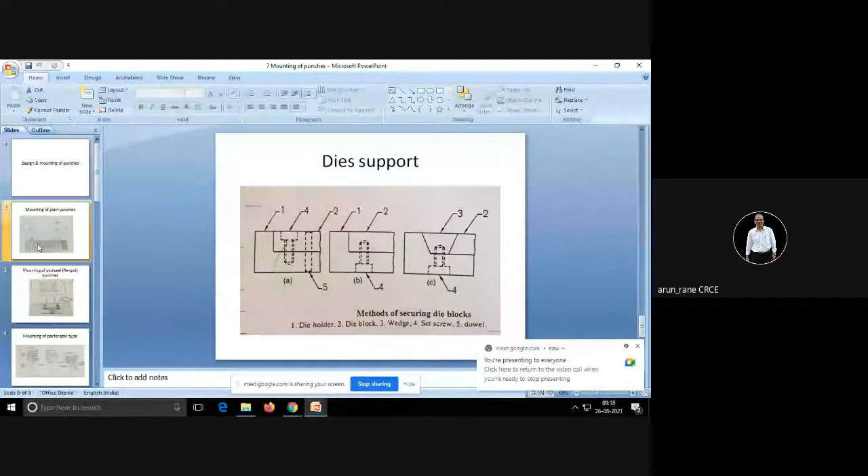Yes, we are discussing now the design and mounting of the punches. So how to design and how to mount the punch. This is a simple drawing showing how to mount the plain punches. Just have a look.

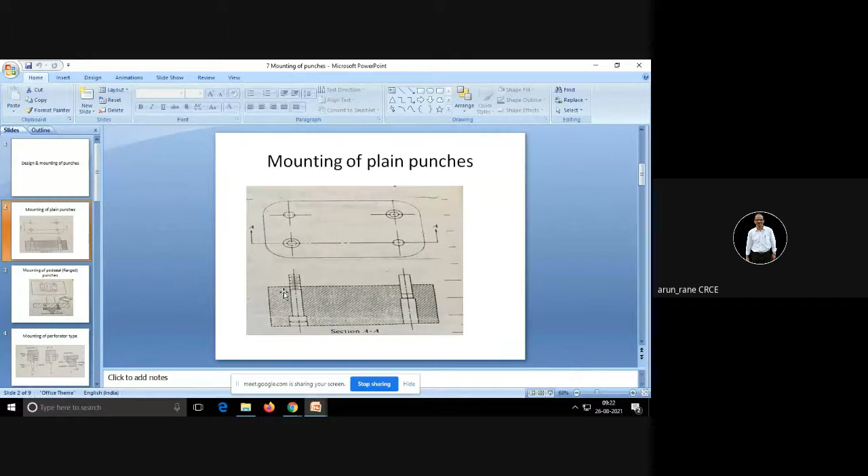This bolt will hold the punch firmly. The problem in this case will be that since it is a threaded joint, there will always be a play in the male and female piece. So you will not get good accuracy of mounting the punches. That is, the punch will not be concentric to this center line, because there is always some amount of clearance in threaded joints.

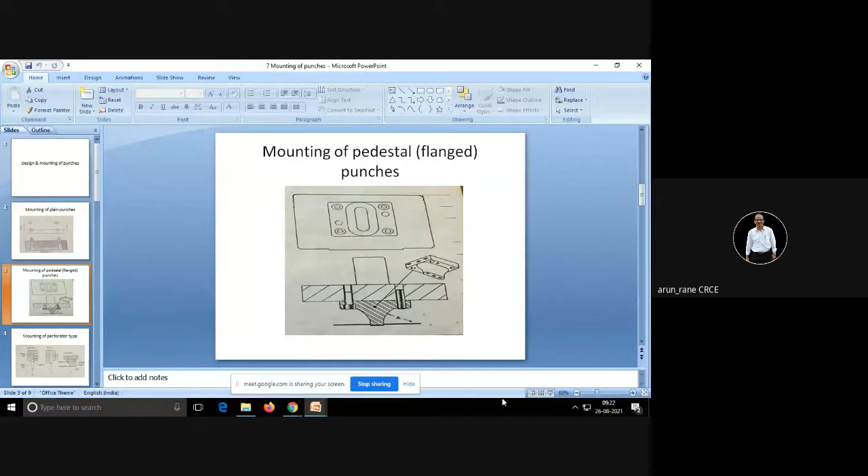If it is a flange type punch, let me give some time for reading and understanding this drawing. This is a punch here, let me zoom it. This is the punch, and this is your stock or strip. The 3D view of this punch is also shown here. You can also check from the top view how the punch is mounted.

So the punch is of rectangular shape, and it is held with the help of these four bolts. These are the four bolts. Now, can anybody tell me what these two holes are for?

Anyone? [Student: For locating.] Yes, and these are the holes for the dowels. These are called the dowel holes. So with the help of these dowel holes, your punch will get located precisely.

So these holes are actually reamed holes, and this is the punch. Now this is not a round shape, it's a rectangular shape, isn't it? That means the orientation of this is very important. It should come perfectly parallel or perpendicular to the edge.

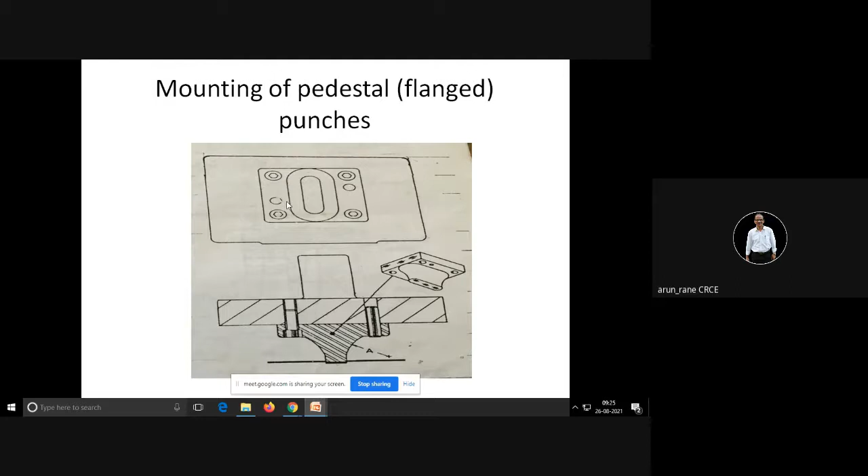Just have a look on how these punches are mounted. A, B, and C - these are three different designs for mounting the punches.

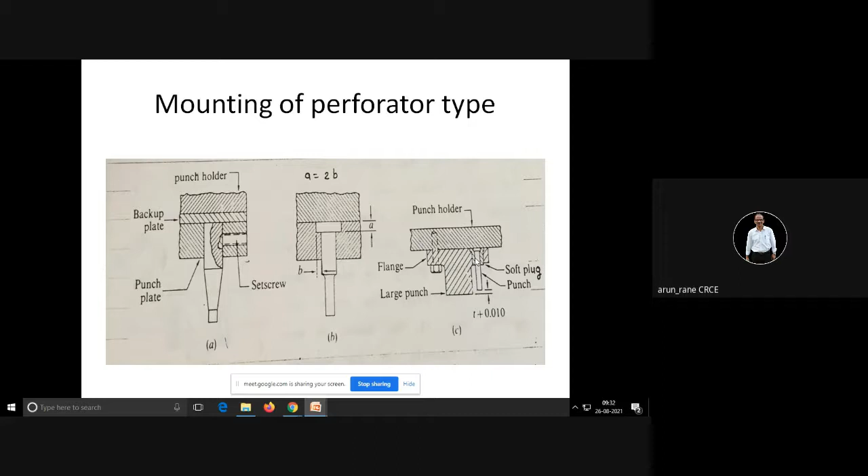Sorry, if there is no place, then you avoid bush, and if there is a place, then you go for the bush. So it depends upon the size of the punch. Any design is okay, this bush is also not required, not necessary, because it's not working. This punch is not moving inside the bush, like our drill, which passes through the drill bush or jig bush, so we say that's a working area. That's why we have to make drill bush or jig bush harder. These are some different designs for mounting the punches.

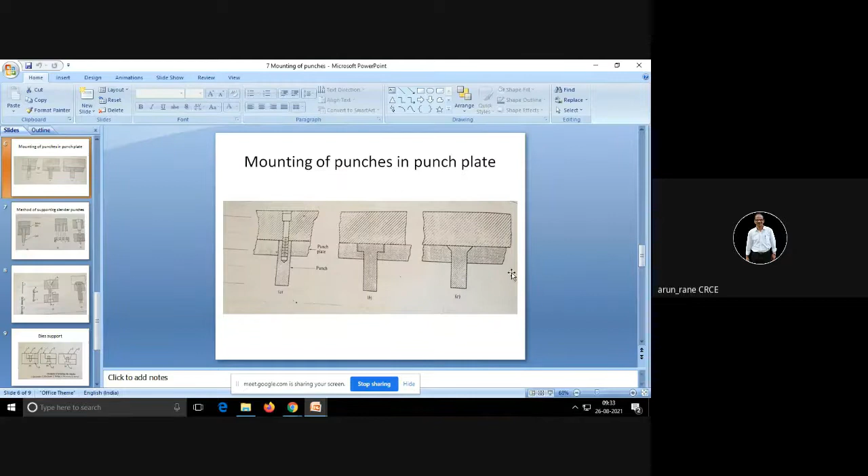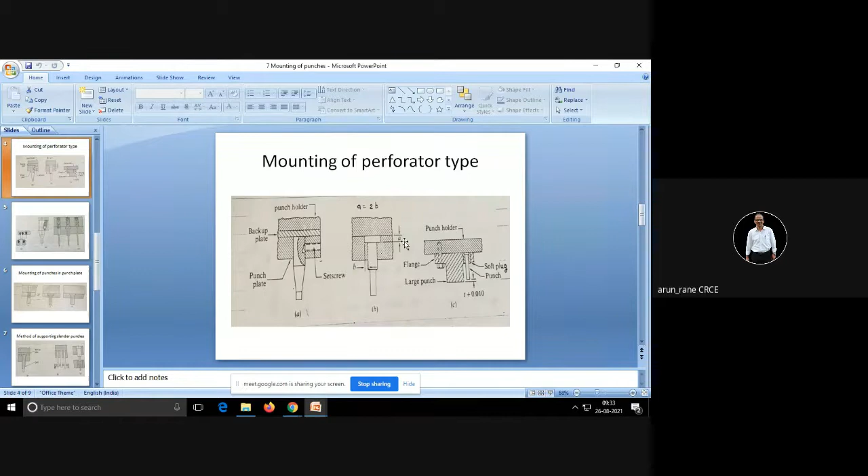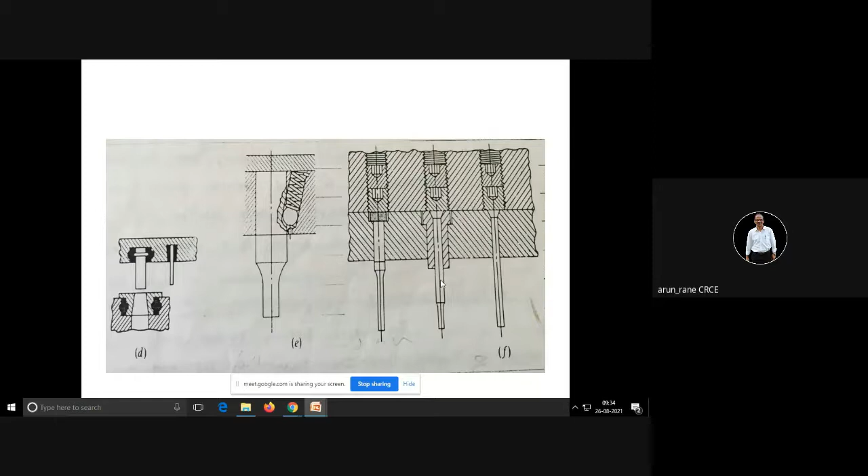So bush type of design is preferred for slender punches. These are some few more designs. This we have seen already. You can also see now this is shown properly, there is a clearance here, so this is not redundant. There is no clearance, so it is tight fit here, and at the head there is a clearance between the counter bore and this head.

You can go for countersunk also. Again, you can have clearance here and go for countersunk also. Or you can go for threaded type. This is the first slide which I showed, that is, you have threading or tapping inside the punch, and then you can bolt it.

The issue with this is that additionally you have to do tapping inside this punch, plus you need to do drilling and counter boring in this punch holder plate. Whereas here this operation is not required, that is drilling and counter boring is not required. As well as drilling and tapping inside the punch is also not required, so that's why this is more preferred. So what is required is just a counter bore here, that's all.

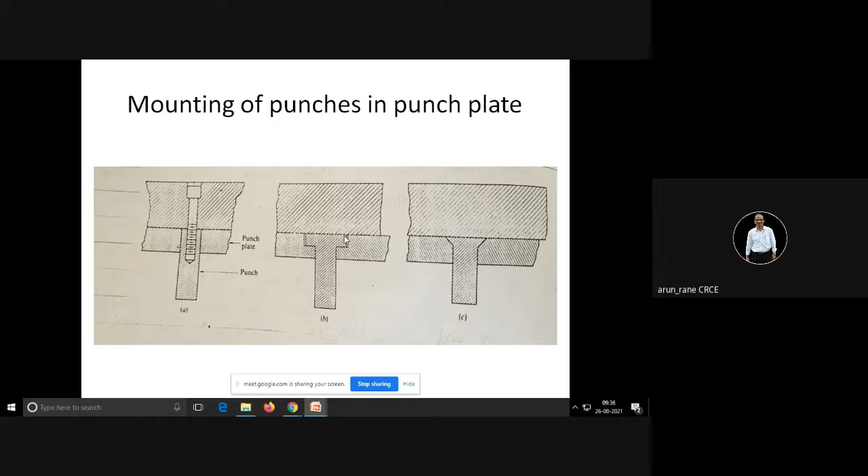There are few more designs for supporting the slender punches. Like this, now here you have a quill, through which this punch is passing. So now this quill or this bush is extended, and you need to extend it as far as possible. Of course, you have to see or take care that this bush doesn't hit the strip.

Here you have one more design, that is one more plate is provided for supporting the slender punches. So now the slender punch is being guided through one more plate. So it acts like a beam having supports at both ends, at two ends. Here it will act like a beam which is supported throughout, only the end portion is not supported.

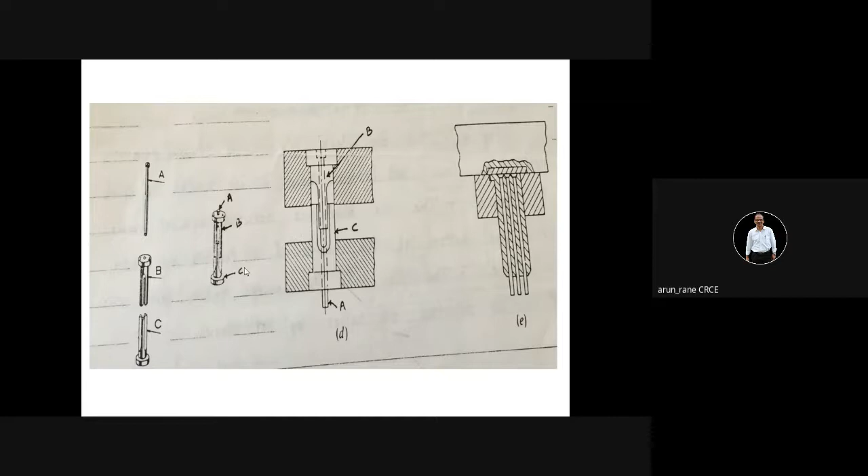This is another arrangement: you fit a slender punch inside another punch which is of more diameter — meaning punch inside punch. Or you can have a number of punches in a big punch like this — one, two, three small punches fitted in a big punch.

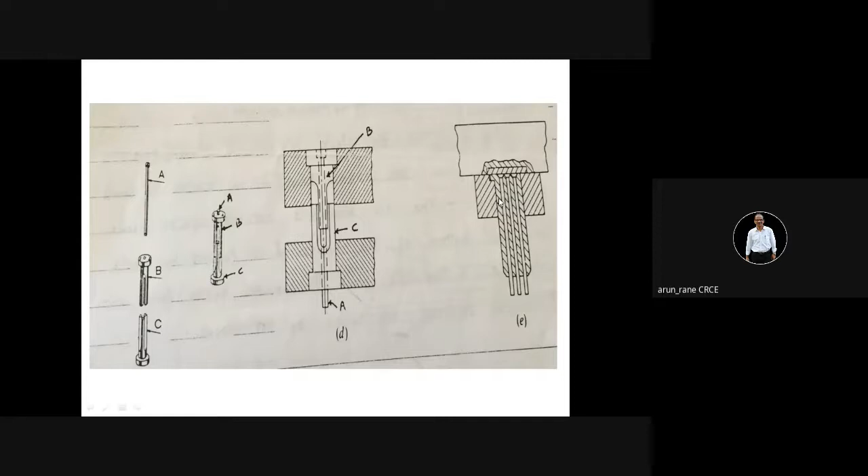Then the bottom — in the press, the top portion is called the punch and the bottom portion is called the die. So just have a look at how to secure the die blocks. I'll join you in a minute.

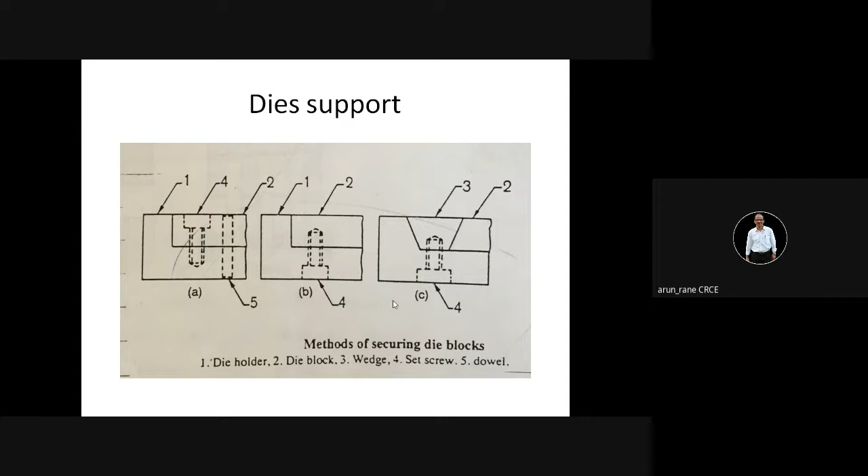So this was how to mount the dies. Now let us study the knockout.

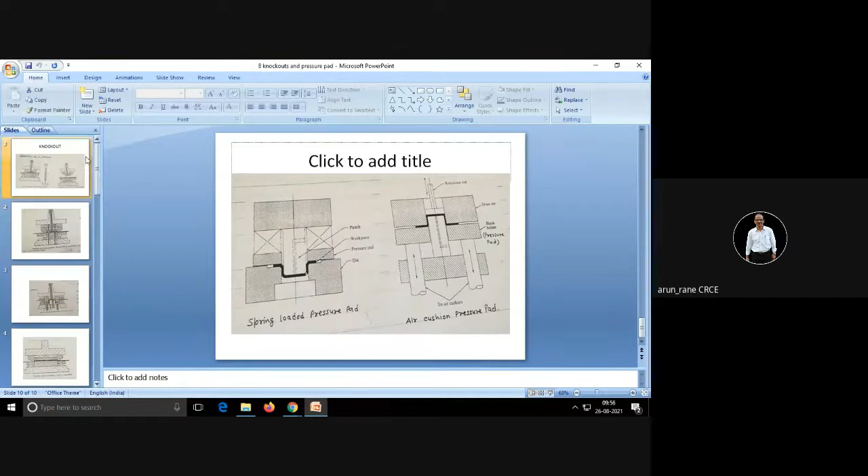Knockout is nothing but ejector pins. Knockout is nothing but the ejector piece. It is required to remove the punched piece properly. I'll zoom it in. So knockout is nothing but ejector pins.

Just have a look at this drawing, try to understand this. Hope you are able to understand this.

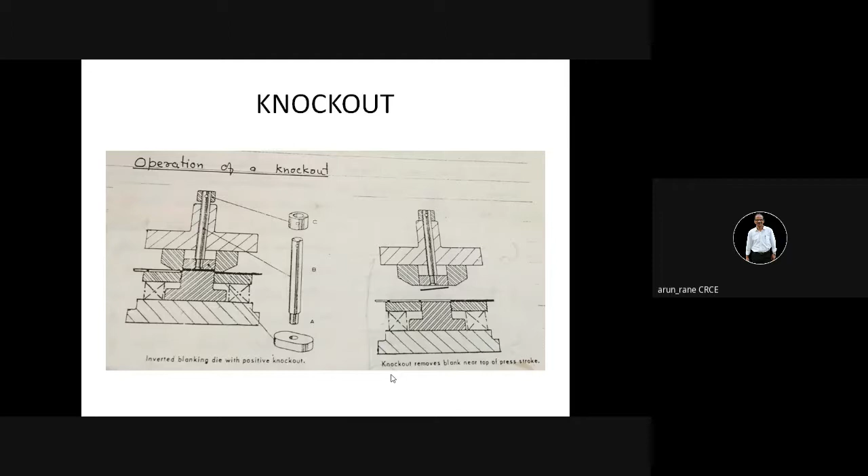Hello? Hello, Hasnain, can you tell me? Hello? Yes sir, are you there Hasnain? Yeah, can you tell me how this is removed? How this is removed? How this blank is removed? Can you tell me? Ashish, yes sir, can you tell me how the blank is removed?

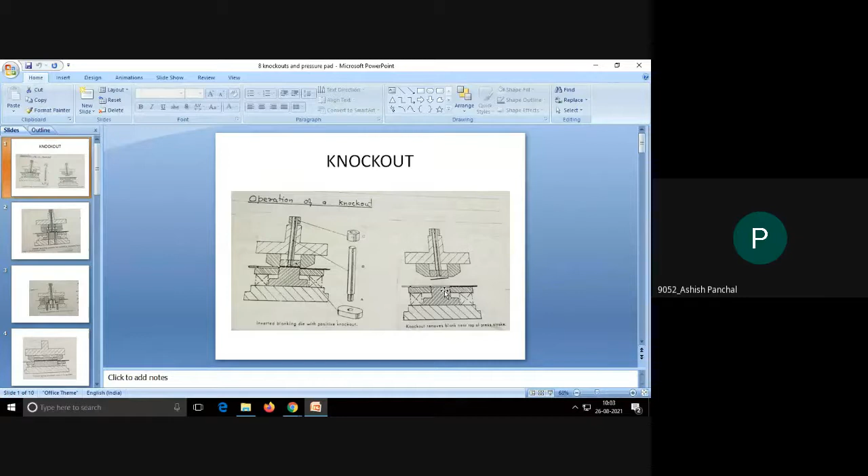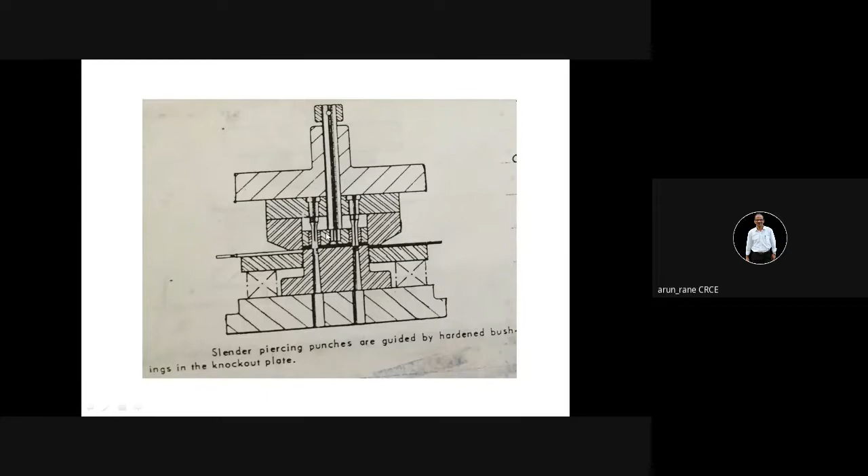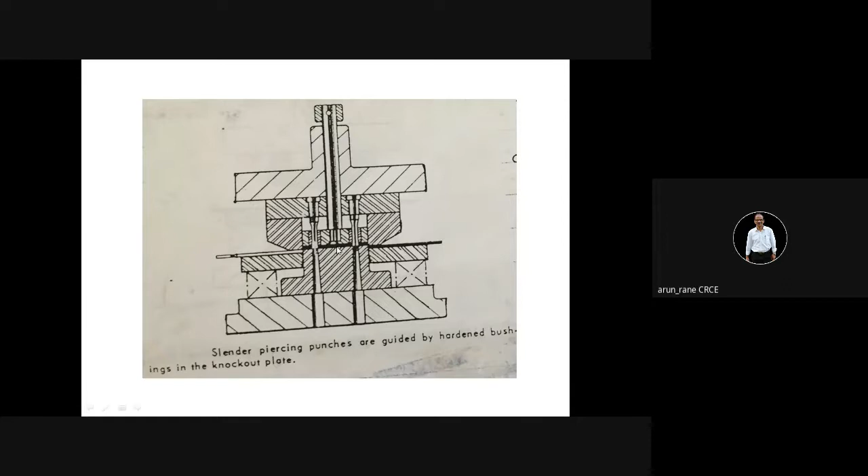Slender piercing punch. Like now, these are the slender piercing punches. They are guided by the hardened bushings. Okay, so now this is a knockout plate, this small part shown here is the knockout plate. And these are the punches. Now these punches are guided in this bush. When it comes up, this plate, yes, again there is a hole here through which we will release air, and this air will eject out this blank. Now these punches are very slender, so that's why they are guided within this bush, and these bushes are kept or fitted inside the knockout plate. So this is what is called the knockout plate, this is the bush, and these are the slender punches. This is a blank which is being cut out of the strip.

Now suppose if you want to eject or knock out the shells or small cups, positive knockouts means you are using some external device or a punch to knock it out. Now this B is nothing but the drawing punch, and this C is a support pad. This support pad is supporting this so that you get a base perfectly straight and flat.

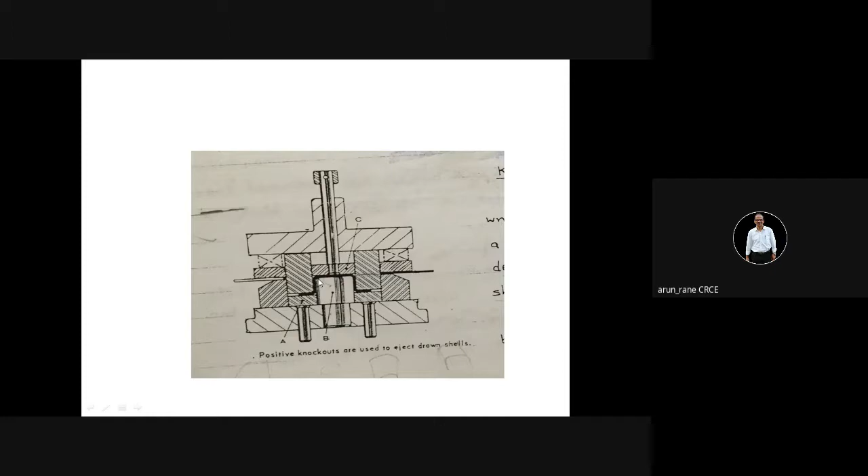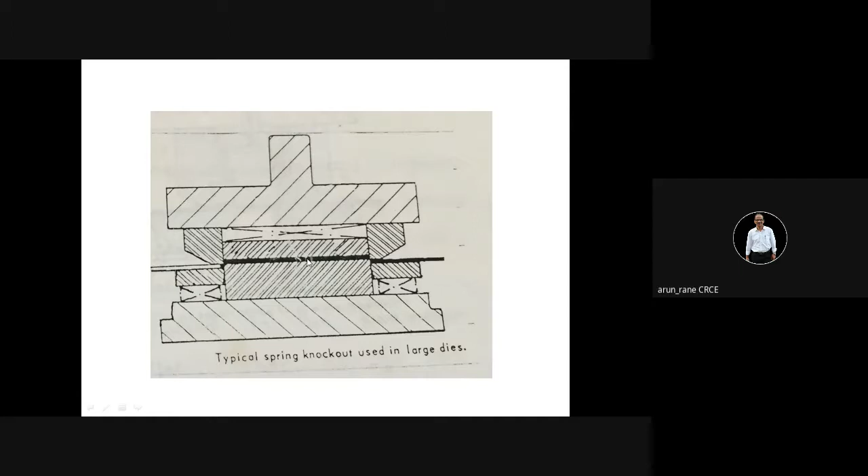If the dies are large, say 100mm or 200mm, then you can have a spring loaded knockout. This is the knockout, and it is spring loaded - this is the spring, shown using this convention. When the punch goes up, the spring opens and pushes this blank. Right now the spring is compressed. As soon as it opens and goes up, the spring presses this plate, which will push the blank down. So this is for the larger dies.

Then you can use your pressure pins and stop collars. This is not much common. Even indirect knockout is also not much common, so you need not worry much about this.

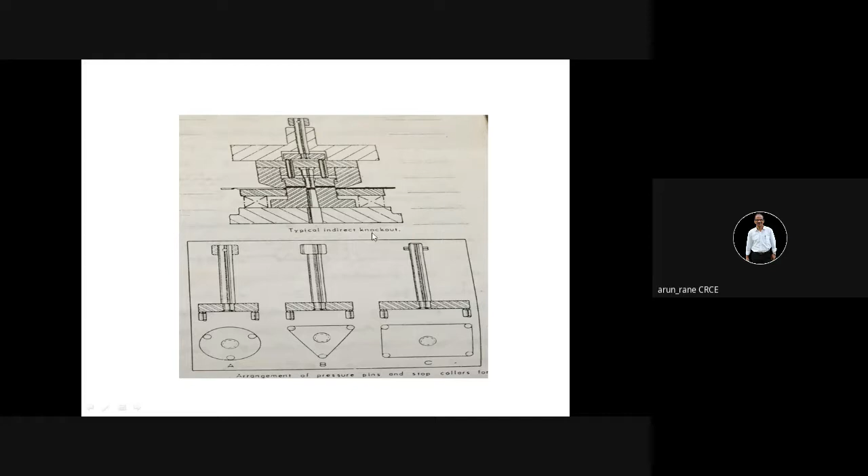You can have different shapes of the spider knockout plate, but nobody uses this spider shape. Everybody goes for a rectangular knockout plate.

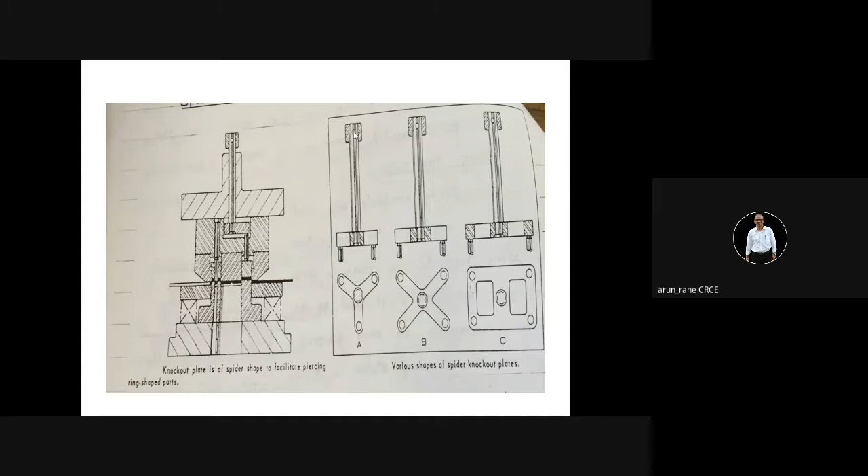So the knockout plates can be spring loaded, or in addition to spring loaded knockout plates, you can have air force. Whenever the spring loaded arrangement is not there for the knockout plate, you have to eject out with the help of air pressure. So these are the holes for passing the air.

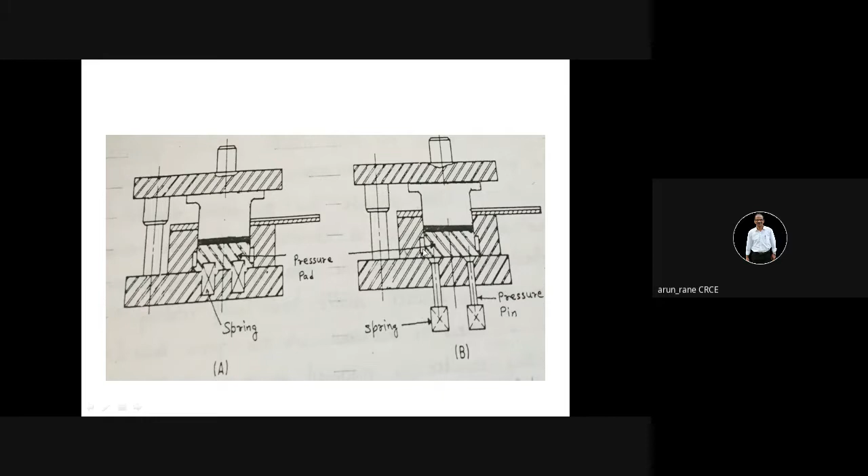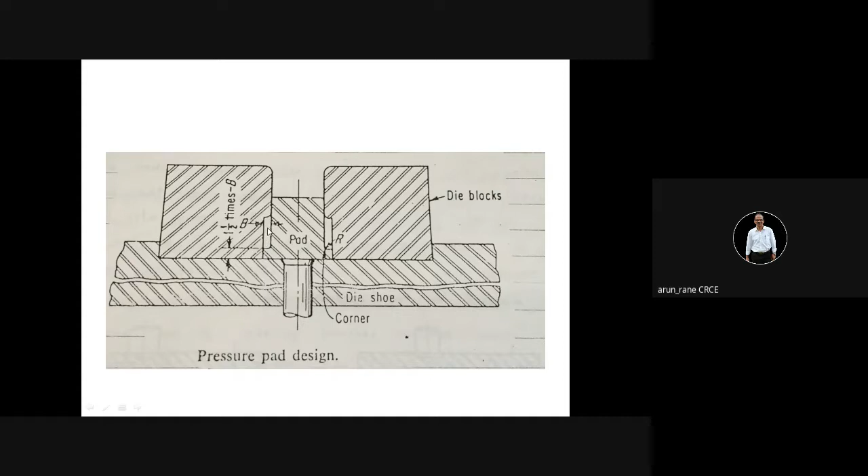This is a typical pressure pad design. This is how a pressure pad looks. This is the size and this is the thickness of the collar. Plus, from here to here, this height - this depth will depend upon how much you want to eject out. If you need to eject out 10mm, it is good practice to keep it 12mm.

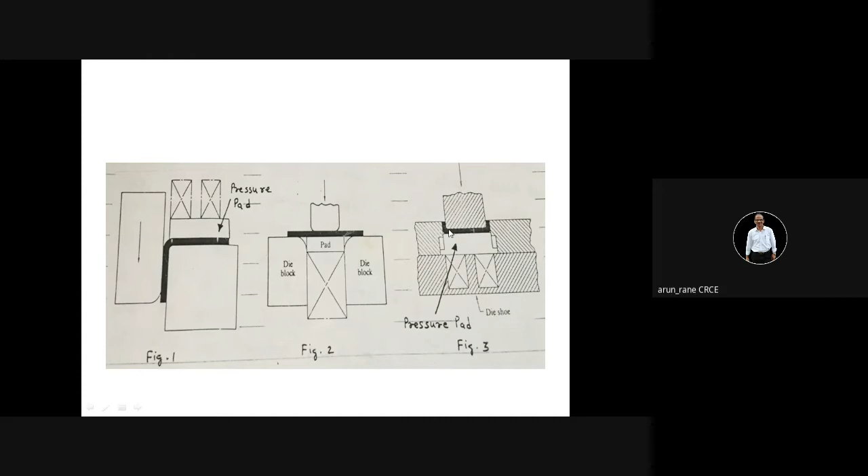You can also have a spring loaded pressure pad like this, which helps in pressing the component. Now this is your air holes - these air holes are enough to eject the component. Similarly, here the air also can be passed from this side, which will be helpful in ejecting out the component.